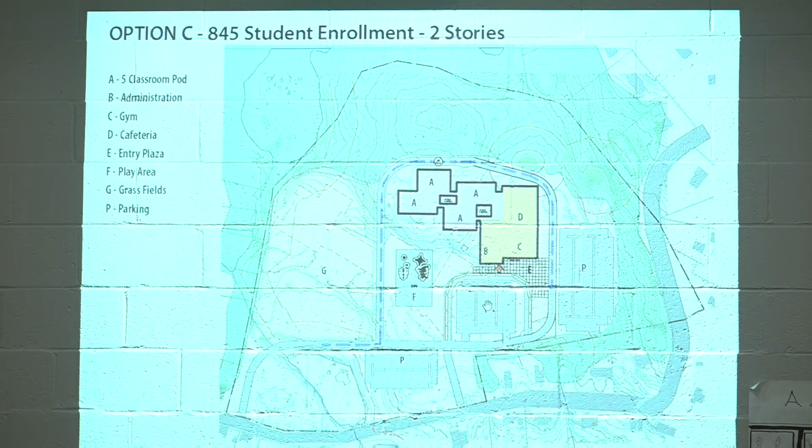And then we go into the floor plans a bit. And now I just want to ask, can everybody see this? Or we have a corresponding board that might show some more detail. So I can pull that ahead.

Hello? Yep. That's loud.

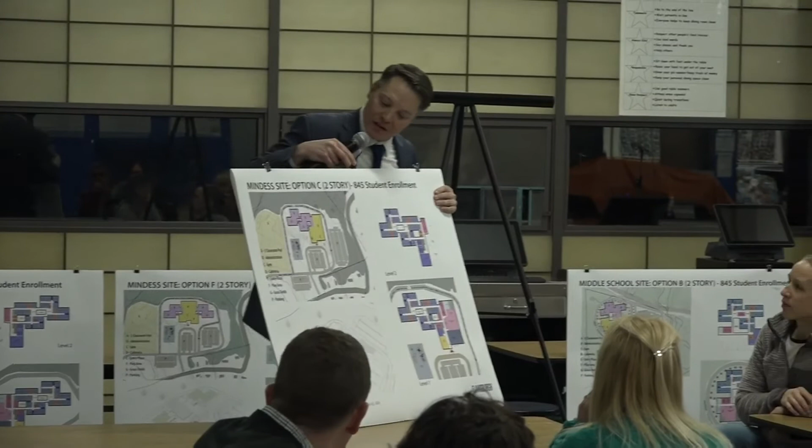So as you can see, this is the site plan with the wings. So you have, for this one, for instance, this would be second grade, third grade, fourth grade, fifth grade on the upper level. And here's the community function.

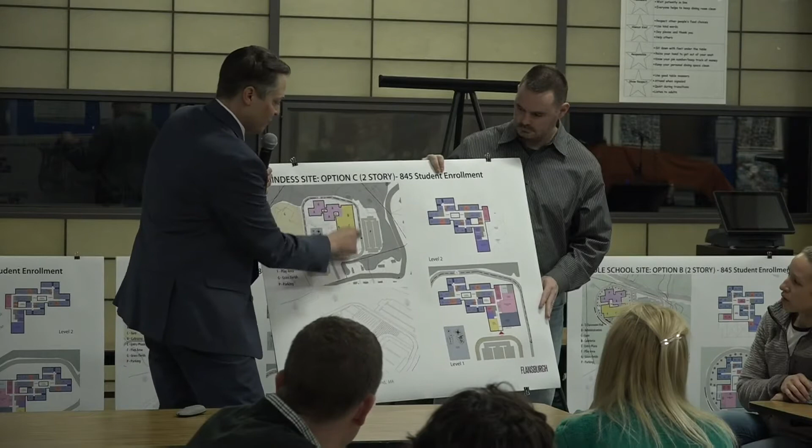Here's that long access for the parent pickup and drop off. And they meet at a new entry plaza in front of the school. And then this would be your corresponding play area.

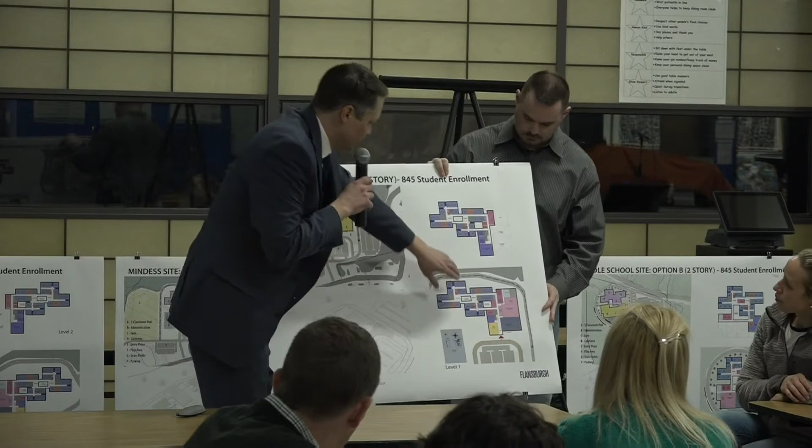And then looking into the plan, what's interesting here is you would enter the school and you'd have all these common spaces used, and you'd be able to lock off the academic wing for after-hours use. And the pod configuration provides an opportunity for collaboration. So within each of these pods, we're able to create a common academic space or team space. And so we feel this is a successful plan.

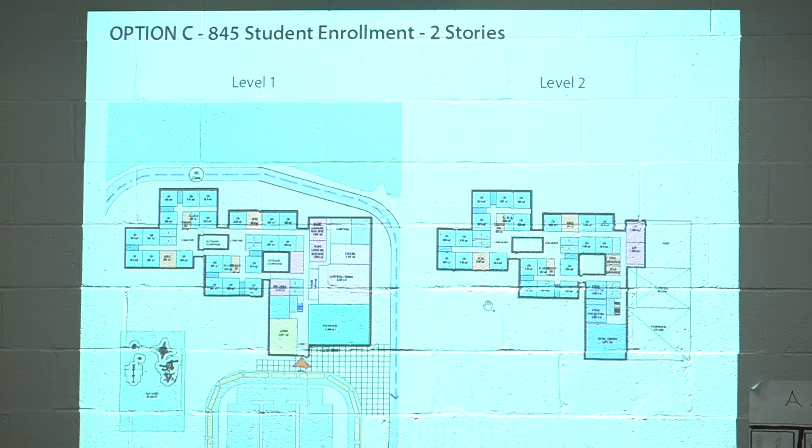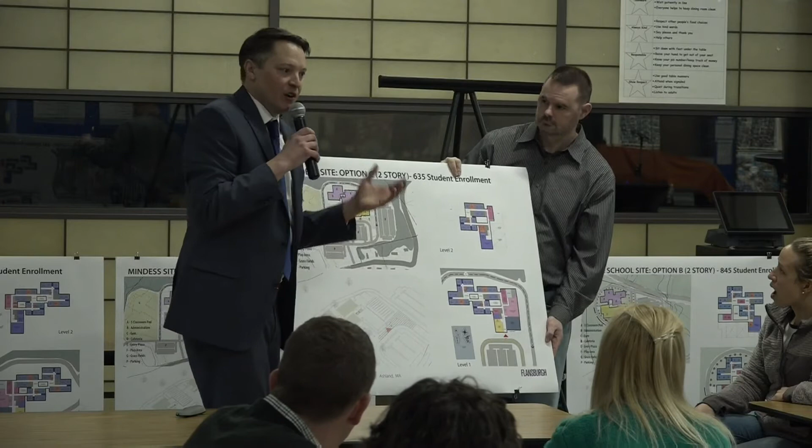And then if we look at its corresponding 635 option, it's simply removing one of the academic wings. So when you look at the big difference between the two options, you're eliminating that one grade. We're keeping everything else the same. And then you have a third, fourth, and fifth. So pretty straightforward.

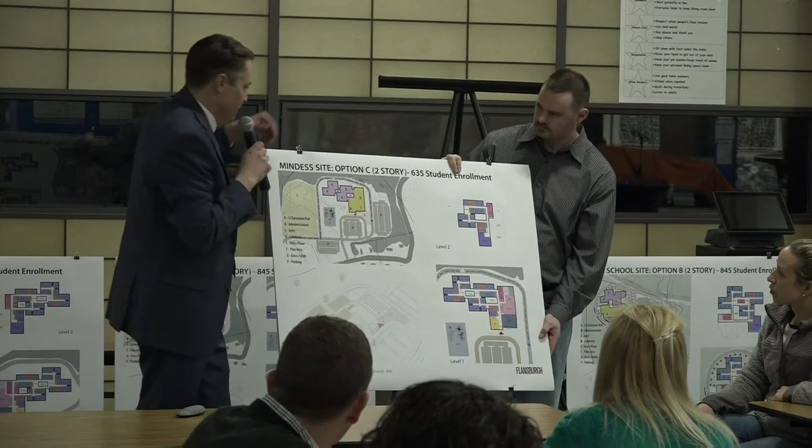Do you want me to pull that one out? Yeah.

So another way to look at this option is we looked at it flipped. And this is right along the edge of the knoll, the hill, the wooded area. And we have some physical models over there if anybody wants to take a look after. This one locates the community function kind of nestled in the woods, while the academic wings are in the field, if you will. Same kind of entry plaza, play area, and a large space for the open fields.

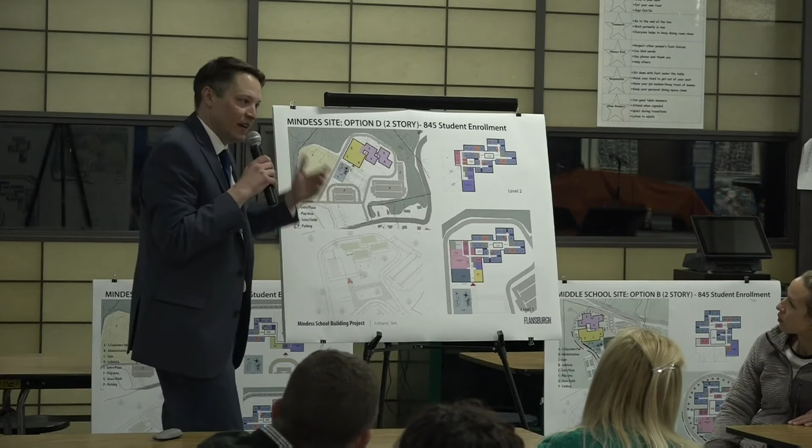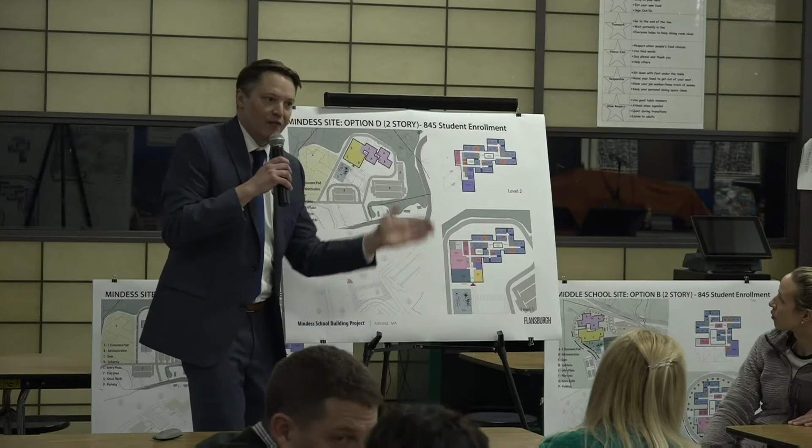But again, getting into the plan, you're seeing these opportunities for either outdoor classrooms, all clustered around these team commons. So the academic experience isn't just classrooms off of a hallway, but classrooms that are all configured around open collaborative space. And we think that's very important, and that's what resonates with the educational plan.

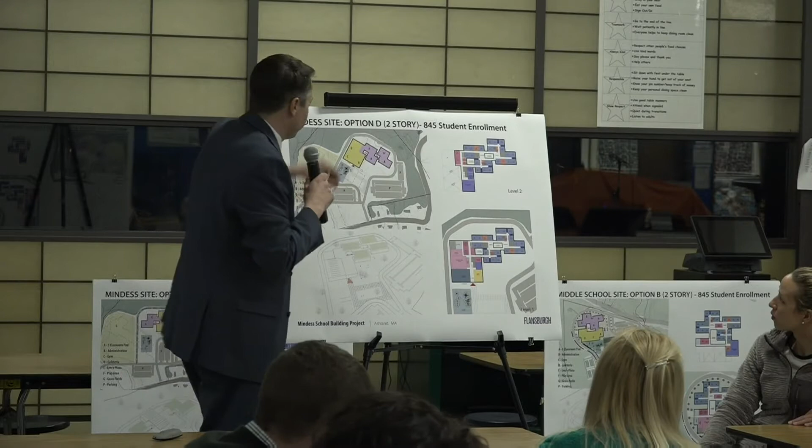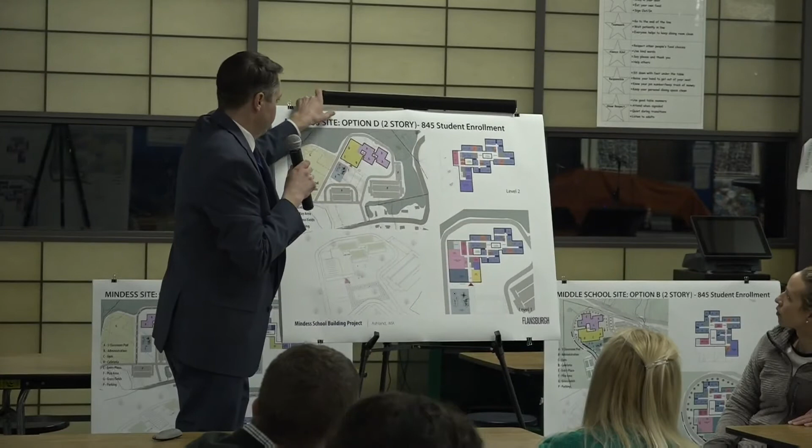So in this option, it's the largest one being studied, so you can imagine 2, 3, 4, 5. And then this one is simply the same thing, just eliminating that one grade. So this would be 3, 4, and 5.

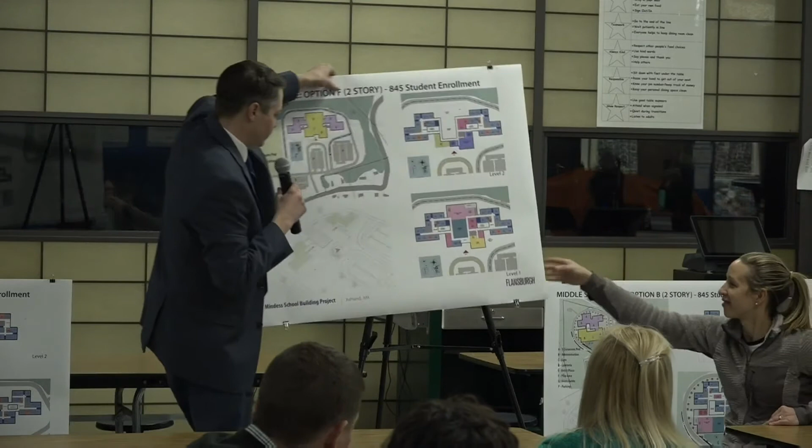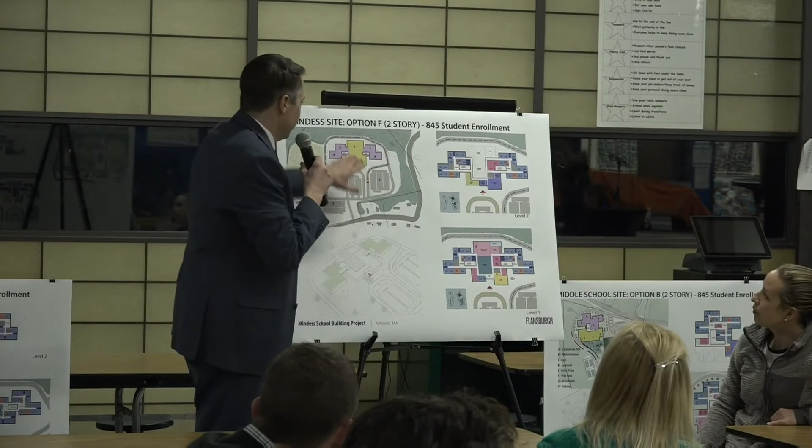So this is option F, which looked at it completely differently, in that the community core spaces were flanked by 2 academic wings. On the larger option, it makes a lot of sense. You could have a lower school of grades 2 and 3, and an upper school of grades 4 and 5.

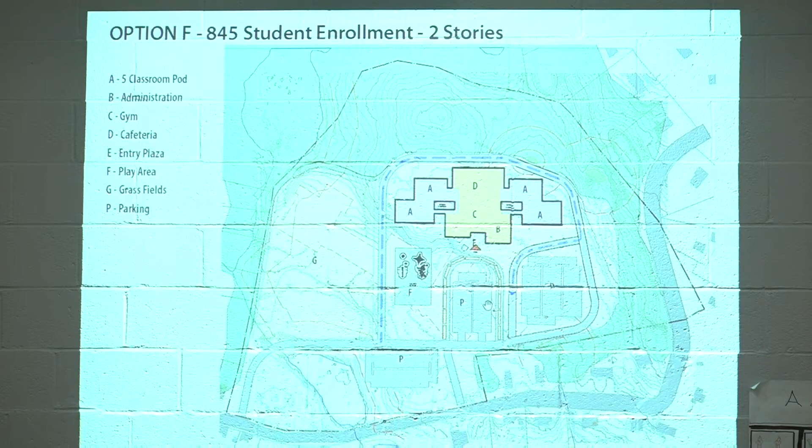But we wanted to look at something completely different. In all the other options you'll see, the academics are kind of on one side and communities on another. This is a different approach, a very traditional symmetrical approach. So we have our parking, drop-off, play field, and again academic wings flanking the community functions. This would be a lower school of 2 and 3, and 4 and 5.

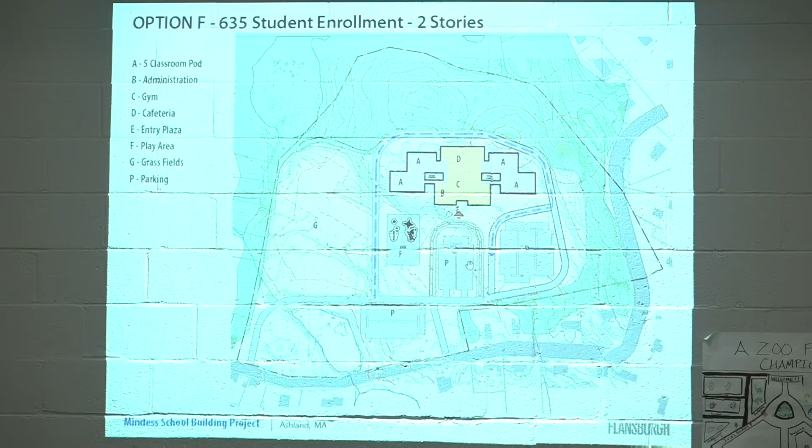Similar configuration for the smaller enrollment being studied, and this eliminates one of the grades. So this could be grades 3, 4, 5, or however the pieces want to get juggled around.

So those are the options at the Mindess site. All of them are behind the school, and 2 of the options have the academic on one side and community on the other, while just one option is completely different, with the core in the center and the 2 academic wings flanking it for an upper and lower school. Are there any questions you may have before we go to the middle school site?

No? We'll move on. At the end we can go into more detail, and then we have the physical models that we can take a look at as well.

So what's valuable about this process is testing out this kit of parts, if you will, again for a 130,000 square foot building. We're trying to look at it as 2 stories. We have the play area, we have the parking demand. We see for the largest enrollment probably 250 parking spaces, and for the 635 enrollment, around 200. So you have a lot of program.

When we began to look at the middle school site, you could see how it was stressed a bit. We started the process by looking at the 845, and it does fit. It's a little tighter than you'll see at the Mindess school site, but part of the process we want to go through is understanding the pros and cons of the same program on 2 different sites.

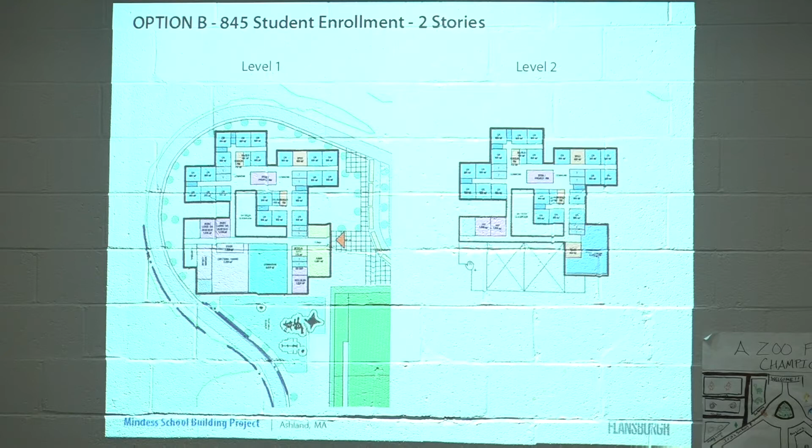One of the advantages to going to 3 stories is you provide some opportunity to access some of the 2nd level roofs, and we see a lot of green roofs being populated, so it's roof area that becomes educational space. We think that's important to take advantage of.

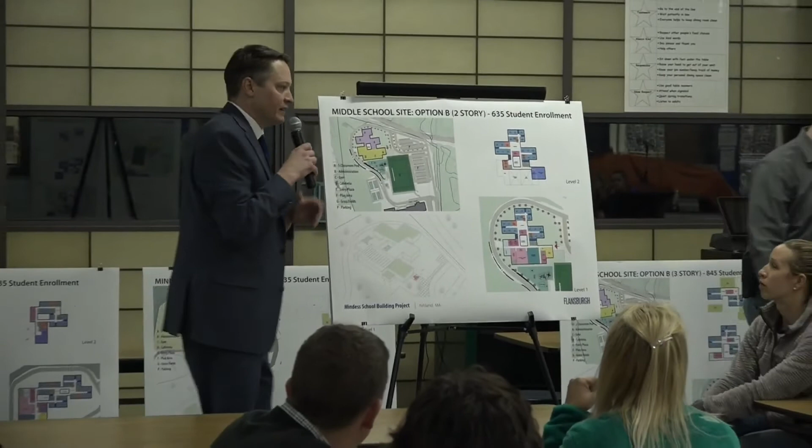Yeah, so it's outside space, so there's play area that you'd see on the ground plane, but if you can take advantage of the roof area, there's opportunity there. And so sometimes we see planters or

But it works, and there's some nice academic spaces that can be captured. So you see a large team commons between the 3 pods and some enrichment spaces within there, and then courtyard spaces as well to bring light into those areas.

And so another way to look at this option is compressing it as much as you can and freeing up the site. So in here, this is a 635 option for grades 3, 4, and 5 on 3 stories. So same core, and here you have the academic wings, so you can imagine 3, 4, and 5. And again, not uncommon to have a 3-story elementary wing, but this creates the smallest footprint for the 635 enrollment option.

And we're testing all this, and it's brought back to the school building committee, and they're going to have criteria, and they're going to be evaluating all these options.

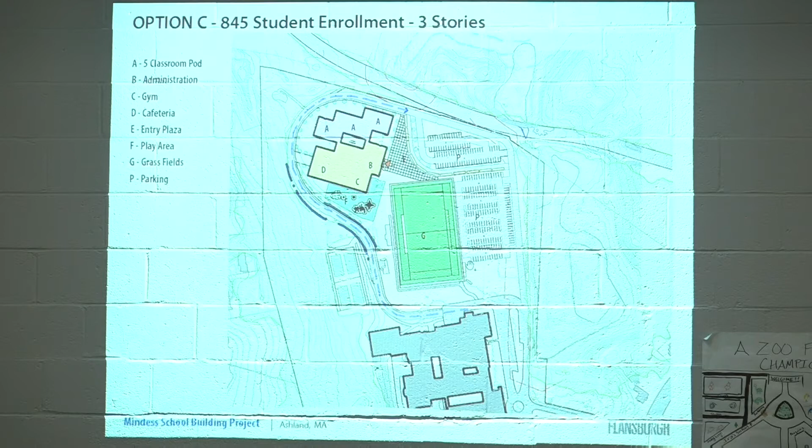This creates some relief within the landscape, and so again, first, second, third. And then for this 635 enrollment option, it's 2 stories and very straightforward. This would have some nice opportunities, again, to separate the community use from the academic, and also some interesting team spaces within each of those 5 classroom pods.

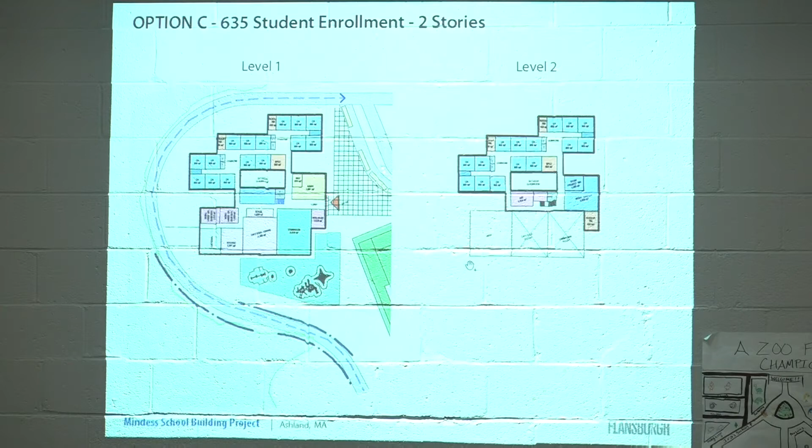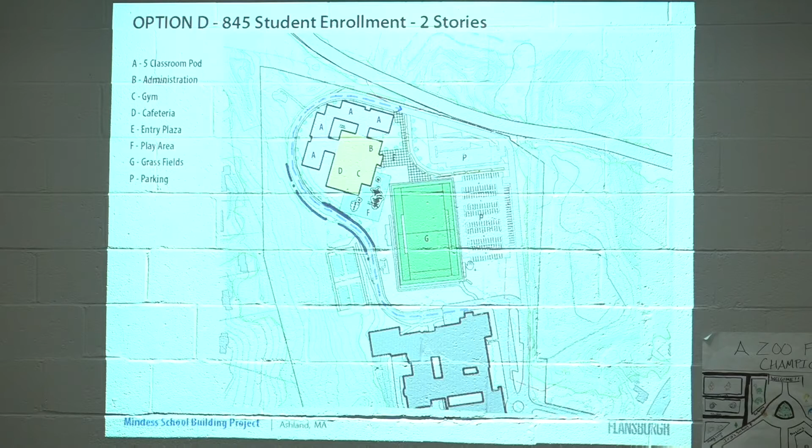So then the last option went back to looking at the largest enrollment at 845, and probably the most efficient layout we could pull together. So we have a large area. The plan is slightly skewed, frees up some breathing room around the multi-purpose field, and very straightforward L-shaped academic bars with the core. And so on the largest enrollment, you could have 2, 3, 4, and 5. So a very straightforward plan.

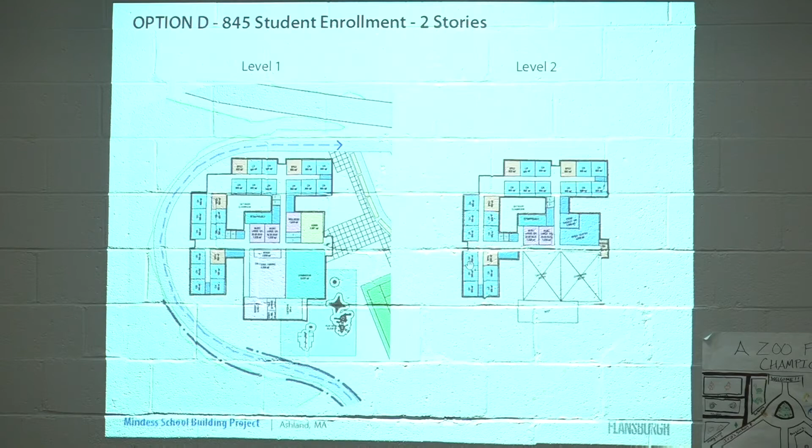And then converting that to the 635, simply eliminates one of the wings here, and we have some art spaces located on the upper level. So that walks everybody through where we are with the design options, and this is what the school building committee, they have a meeting tomorrow to begin the evaluation of these options.

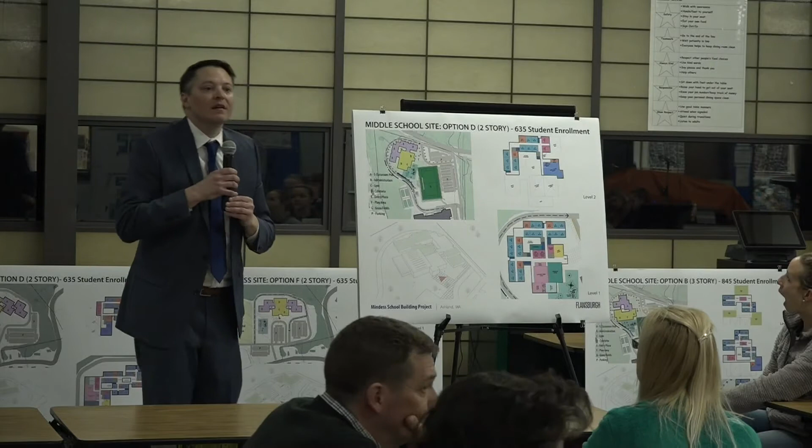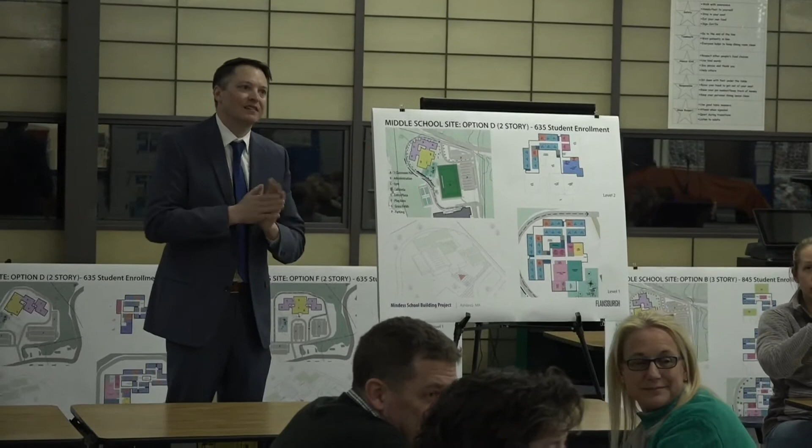We all want to be able to hear you, Jimmy. Oh, my. The site plans are all your current ideas of change from the original.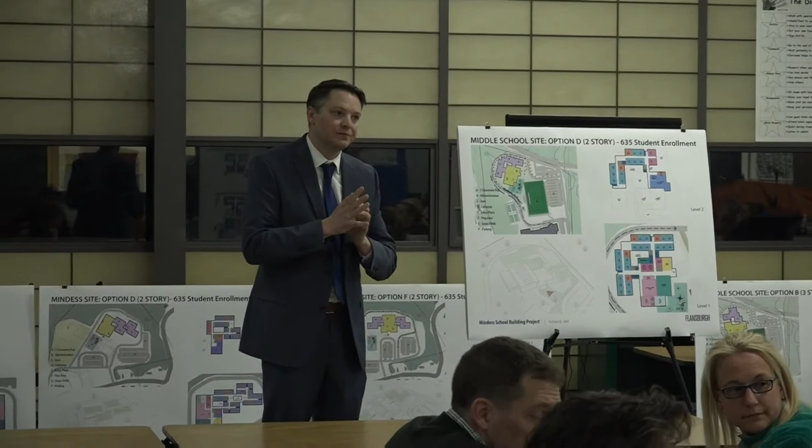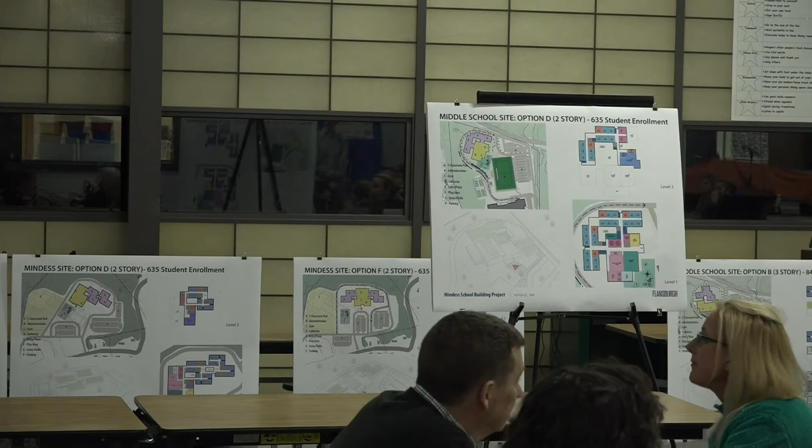We have a bylaw that says all rainwater, rain runoff water, or any other water has to be maintained on the site. Now, does that take that into consideration here? Yes, all stormwater and runoff from the parking, the buildings, and at the middle school site, we need to consider even the existing middle school to an extent with all the impervious pavement. And we have a civil engineer who will create narratives to capture all that with a stormwater system. So yes, that's part of the pricing. So you're seeing the design, but we also are creating estimates, and so the stormwater management system is part of that estimate, yes.

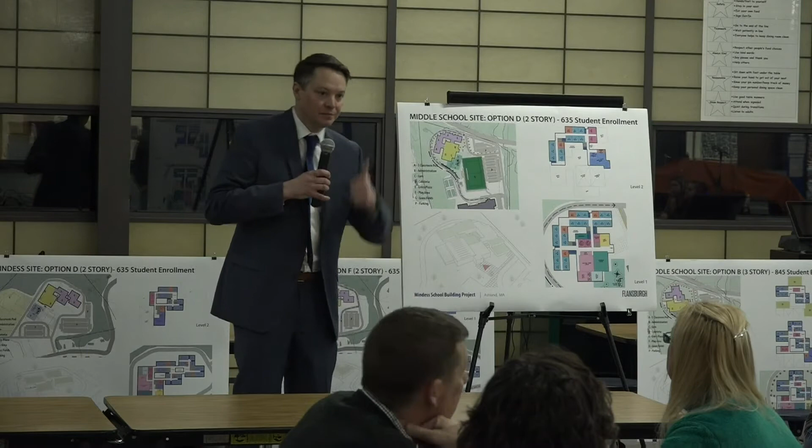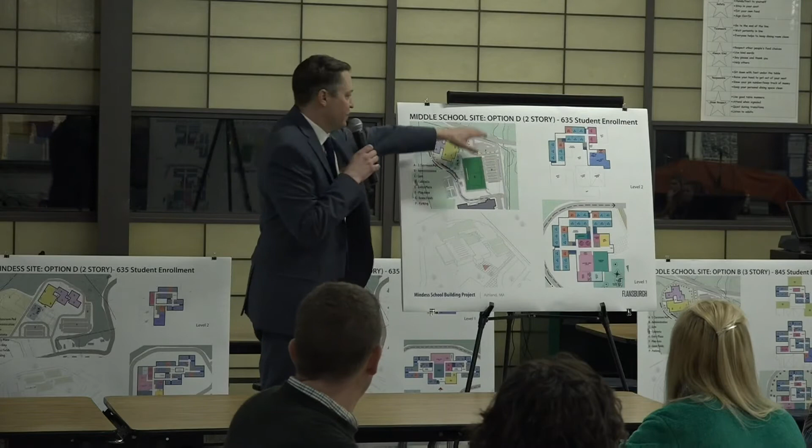If Mindess is moved to where the middle school is, will traffic be going in through the MBTA access road, or will it be going in through the middle school driveway? Is there access, if it's at the middle school site, is there access from the MBTA access road or off of West Union?

So currently, we do not own that land, but we're in discussions with it, I think we would like access there regardless of this project, right? Even from the current situation at the middle school, having another form of egress, access and things like that. So that impacts not even just the operation of the school, but utilities that could come from there as opposed to all the way runs from 135 or from where the middle school is, depending on that. Also construction access. And so for a project at the middle school, acquiring that, it makes a lot of sense, it would make it a much more viable project for sure.

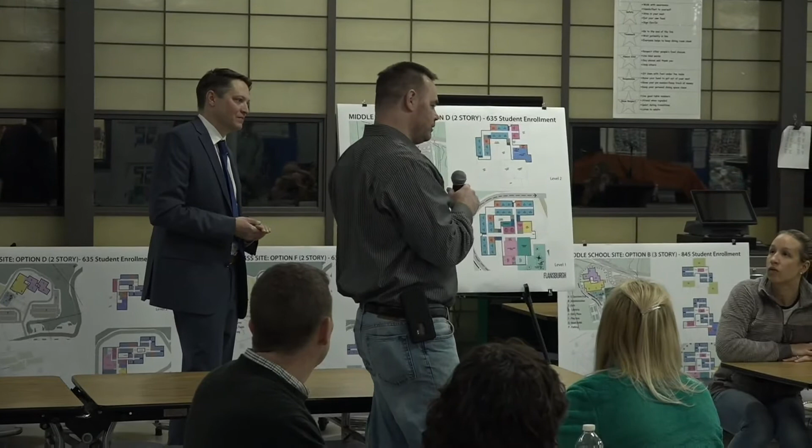So in an ideal world, yes, that's what you hope for, but it might not happen. We can't show it on the plans right now because we don't own it or have easements for access right now. Whereas if you notice on the Mindess site, he did mention Fisk Road, because our property line goes actually over Fisk Road.

So you'll see over there, we could actually use construction access off Fisk if we needed to or wanted to for the Mindess option, because we currently own property across Fisk Road.

Yep, go ahead. I have like three questions.

If Mindess gets moved to the middle school, the two schools will not share buses, correct? Correct, there's nothing about combining them other than having a campus feel. So busing is something we'll work out. Jim and everyone has looked into it. At most we'd be adding a bus, but those are details we're already looking into, as to what the impact would be servicing four grades and what that looks like.

One is, you talked about the need to queue 80 cars. Where does that come from? It's been a while since I picked up a kid at a school, but I'm wondering, is that being given as a necessity, and where does that come from?

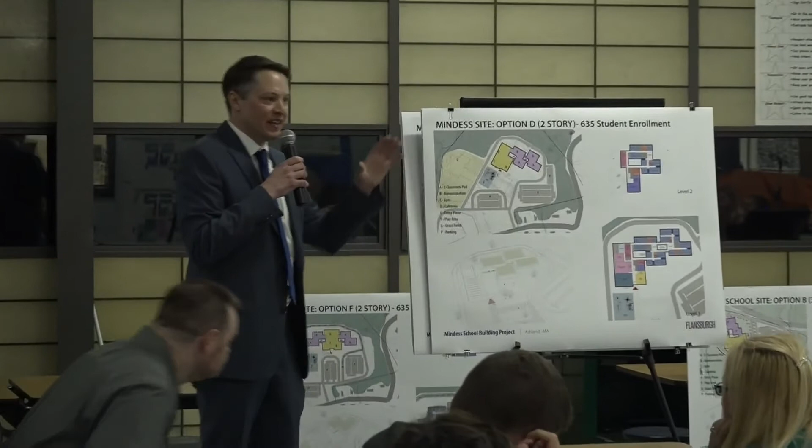So part of the feasibility study, which we're required to do, includes a traffic study on site. They observed pickup and drop-off at the middle school site and the Mindess site, looking at it in 15-minute intervals. Dropping off at this school at one point for 635 students, or 600 in current enrollment up to 670, was approximately 60 cars at one time in a 15-minute interval. They add more queuing space for the largest enrollment, and that's how we got to 80 cars.

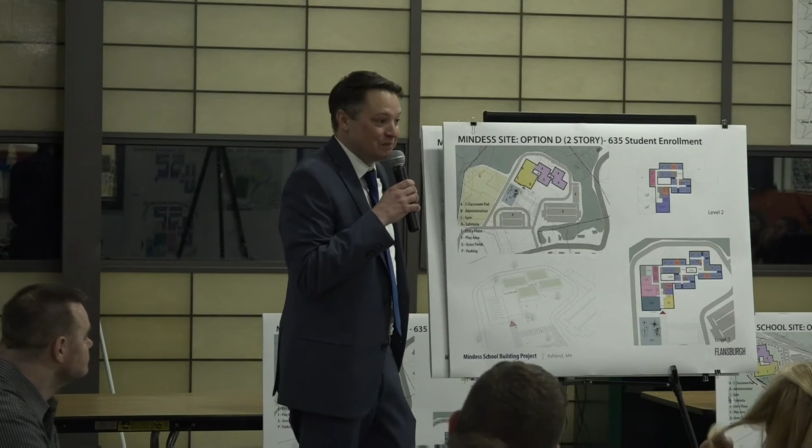Pickup is sometimes the most stressful because people arrive early and begin queuing, and 80 cars goes quick. That's why you need that length for vehicle storage on site, so it doesn't back up onto Concord or West Union. But it's part of a traffic study by our traffic consultant.

I guess the only other thing I'll say is, if it creates an expensive and sprawling project, we should look at ways of managing that rather than just accepting it as a reality. But the other thing I wanted to ask about was all these different options—what you're not showing is the number of mature trees that would be cut for each option, and I know we have a whole section on sustainability here. I'd suggest that as we go through this process, you lay out pros and cons, and especially when thinking about children and climate change—this is really their inheritance—that we have a project that's as sustainable as possible, noting if we're clearing mature trees in any option. I think that would be an important factor to have.

So thank you. To address both those things, Rob: first, the queuing—as you'll see on all of them, it's usually going to use that loop road around, so it doesn't increase the size. That loop road is needed for access for emergency vehicles anyway. In some projects it might not be paved all the time, but it's there; we're just paving it and using it for queuing, so that wouldn't impact the project from that perspective.

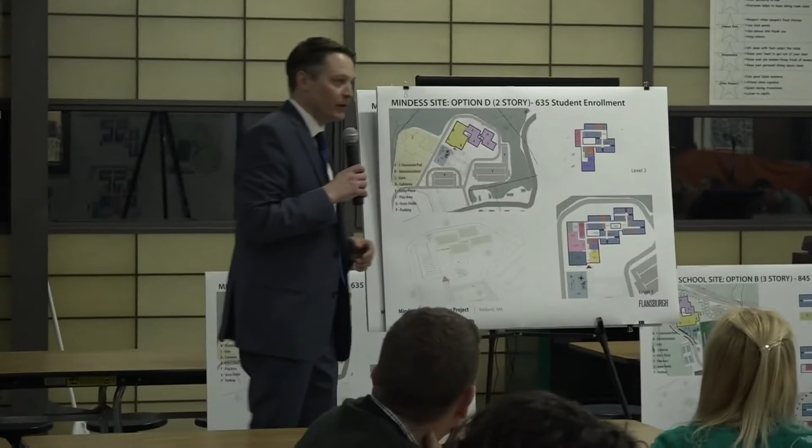My question has to do with the play space, the outdoor green space for the kids. Thinking about the site at the middle school, it seems like there's less play space for the kids. I know they can utilize the turf, but the middle schoolers utilize the turf as well, so it would be more of a shared space. Whereas now on the Mindess site, the kids have quite a bit of space, so I wanted to ask how that's going to get reconciled.

I think for starters, that's why we want to make sure we get that 20,000 square foot range just for play space. I think supplementing with the multi-purpose field is a good thing. That would have to be scheduled with their recess time. But you will not, as you see in a lot of the Mindess options, the grass play area given back in all those options. There's just not the opportunity because it's monopolized by the parking spaces at the middle school.

And for the most part, the turf field isn't used during the same time as recess would be. And even if they did, most of the time for the middle schoolers they get like 10 minutes at the end of their lunch period to go out there, and they never venture out that far anyway.

So the idea is you're still going to have, and we're trying to compress - as you saw we always started with a 3-story 845 option with everything. That's your biggest footprint to make sure it fits. If you just stick an 845 on there and you don't do a lot of manipulation, it's tight, and you're really squeezing in that play space, especially with the loop road going around the building. But as we work with the design, we will free up outdoor space and probably have a bit more. It won't just be, hey, you're either on a play structure or on the turf. There'll probably be some middle ground there as well.

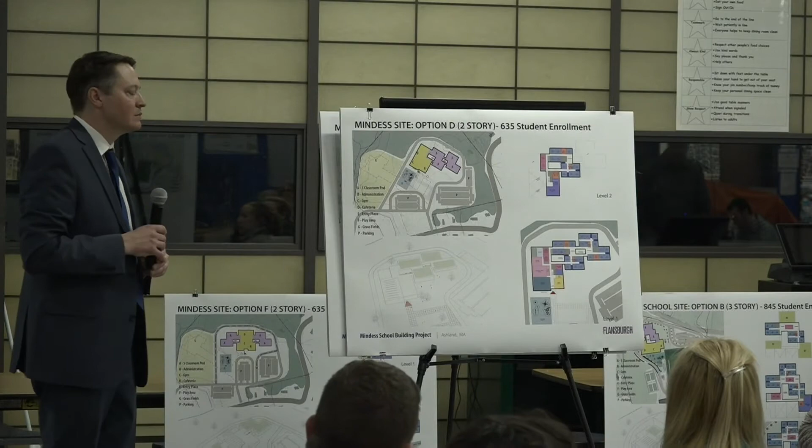If the new Mindess was to be built here at the old Mindess, would that affect outdoor recess during the construction?

It would certainly impact the use of the play space. We would still be able to have a really efficient outdoor recess because we'd be able to utilize the front space instead. We would lose access to the climbing structure, but I think we'd be able to have a great recess because the majority of our students really play in the green space on the field, and we would open up the entire front of our school for kids to have recess during that time.

These are all great questions. Keep them coming, because this is going to help the school building committee with their evaluation.

I wasn't at the last meeting, so this might have been covered, but I was wondering for a refresh on the timeline as far as when this building project would start and when it would be finished.

All right, so timeline. The more immediate timeline in front of us is to get the feasibility study completed and then brought back to the town voters. The major milestones are that the School Building Committee, Board of Selectmen, and the school committee would make a recommendation on the option that would move forward in April. So this April they would pick the big ticket items, the size of the school and which site to move forward on. Then it would go into the schematic design phase of the project and come back before the town for a funding vote in the special town meeting anticipated in November with a ballot in December.

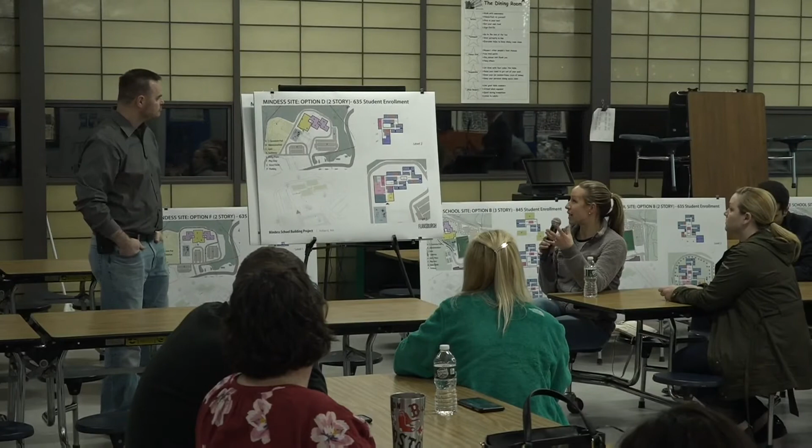Might be a silly question, I'm just kind of learning all of this now. So if you guys are looking to buy the land to have an access road from the commuter road area, are you also trying to buy some of that land to then make this footprint not be as condensed, so that it makes it a little bit easier for space?

Yeah, so the impact of that lot, I think we have it on here, right? So there's a couple of impacts. It's hard to see the sliver here, but essentially it's this land here. And so it can ease a little bit of the site constraints, because now instead of having this be a setback line here, if we own the property back here, this could sit back a little closer to the road and ease some of that stress.

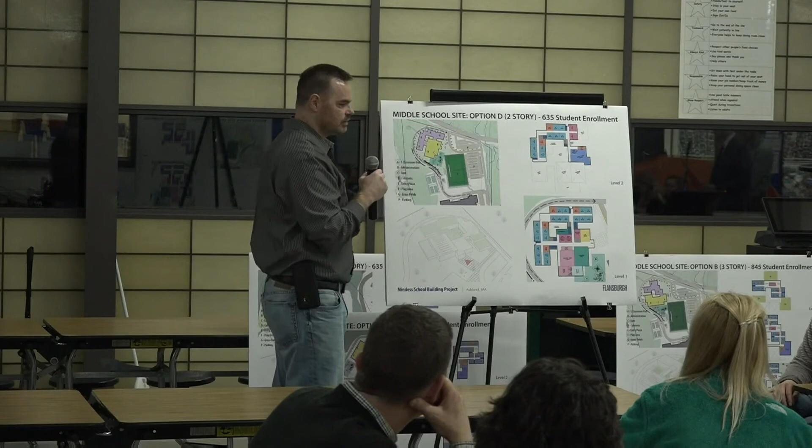And we could potentially have some queuing down there. It helps in the ways I mentioned before, because right now we'd have to, if it's possible to tap into the utilities already at the middle school, run them all the way over here. If that's not possible, we'd actually have to tap in all the way to 135 and go over, which is expensive. Also construction access and things like that—even getting an easement for construction access is a big deal from here. So yeah, that property impact has potentially impact for several different little things.

I guess I'm kind of sitting on the notion of, I forgot about the YMCA. So I'm curious if we've looked at that traffic feasibility with the Y, with the new elementary school, with the middle school, with the commuter station out there—how congested do we foresee that to be, or do we see it as more of a positive, I guess?

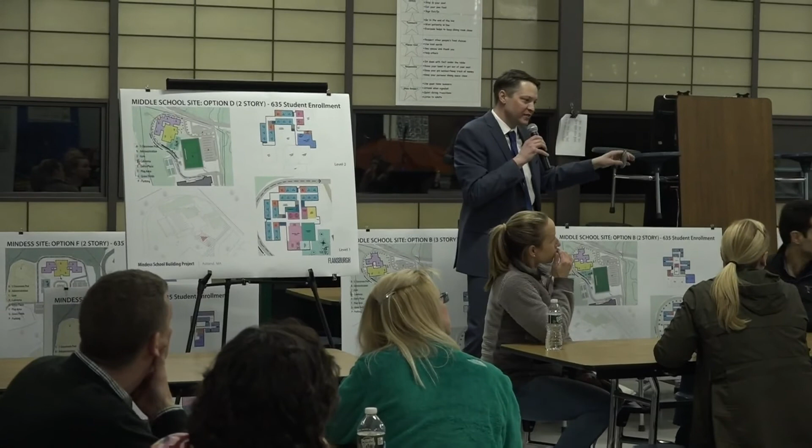Yeah, that was part of the preliminary traffic study. If we were taking a deeper dive into the middle school, they would do another assessment, but they calculated based on knowing the YMCA was there, and obviously the MBTA access and activity. And because we don't have that little sliver, they said, as part of the traffic report, if that was acquired, that would benefit access. But they knew of those other entities. Yep.

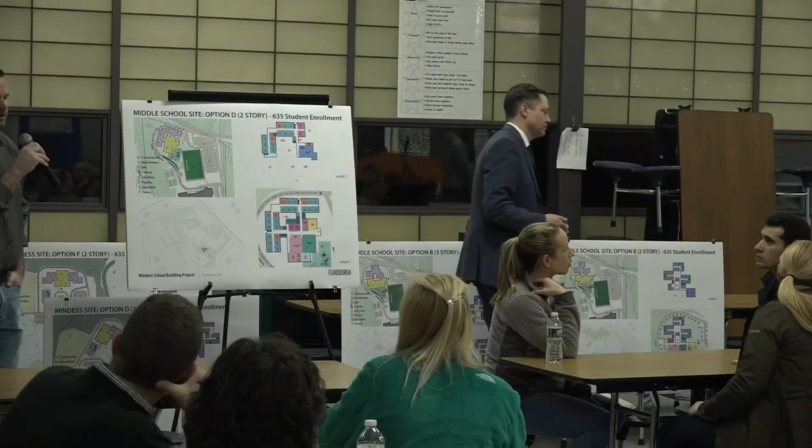I think it's viable either way, but I do think it's something that we would eventually want to have that access. I think we want that access today. I think it just makes sense.

I've already spoken with Michael Herbert about it, so nothing's a surprise here. This has all been discussed, and they're well aware of it.

But to build on what Paul said, the middle school site does survive as it exists today, because the existing West Union Street is a double barrel, two lanes coming out of the site, and has enough queue length on the parcel itself to handle the additional school. Getting the MBTA access would make it better, because you'd provide two means of egress and access to the site. But because the existing school is deep on the site and the new school would be deep on the site too, there's enough room to get people on and off the site reasonably.

Just to add with the pricing component of this, there would be a slight premium for utilities coming from West Union Street deep into the site. But one of the benefits is the middle school and the elementary school still will have staggered start times, so you're not duplicating that population at one time.

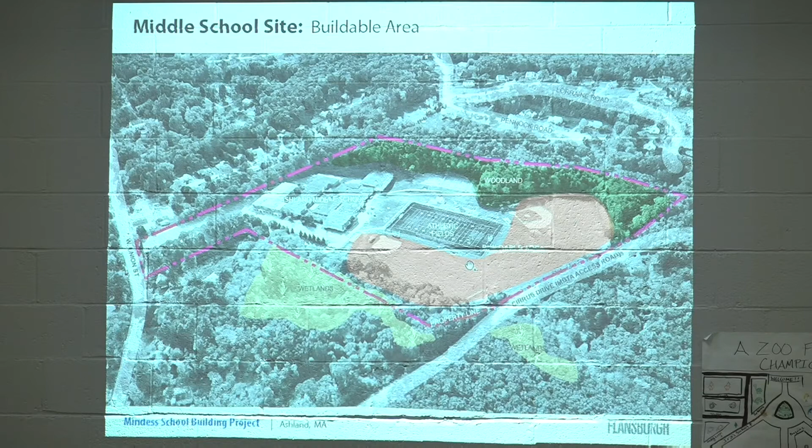You can get there from the backside, run it right down the Woods area, come up to where the site is for the railroad passengers going up the hill to the railroad trains. There's a whole line going right through, and it drops you right in the backyard of the middle school. I don't know how many people have looked at that as an example, but that would take a whole load of school traffic, just for school use, between the seniors and kids with cars and the school buses. It's something that could be asked for if somebody owns it that we don't know about.

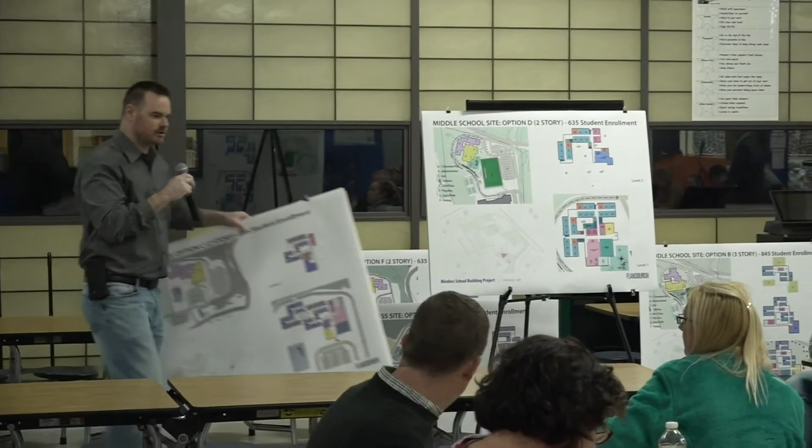That's a good segue into some of the things I wanted to share about what the committee has been considering and how we got to these being up here. As he said, we started with option C, but there was obviously option A and B and things like that before it. So what you'll see on the floor plans is these adjacencies.

For elementary schools, the MSBA does not support auditoriums. So we have an auditorium in this school, it's a great luxury, it's an asset, but in a new building we would not be reimbursed for building that. I couldn't recommend trying to do it on our own, it would be very, very expensive.

So what they do support is what's called a cafetorium, putting a 1,000 square foot stage attached to the cafeteria. Most of these you'll see for lots of different reasons, but also for the utilization of that space. We will see these adjoined to the gym and the cafeteria, so that way we can potentially gain more usable space for those things. We play with the adjacencies and we're going to continue to play with them to see how we would want to maximize that. But that's how it's going to be addressed going forward, a stage attached to the common spaces there.

Some of the things I wanted to point out, and I think the one on the back is a good example of what resonated with the school building committee, is when these pods - there's a lot of them, they don't show them awesome here, but there's these common spaces between them. There were some options thrown out that aren't up here that kind of just had a corridor of classrooms, a corridor of classrooms, a corridor of classrooms. But aside from having nice new rooms that may have better air quality, that's the same building you would have built 20 years ago.

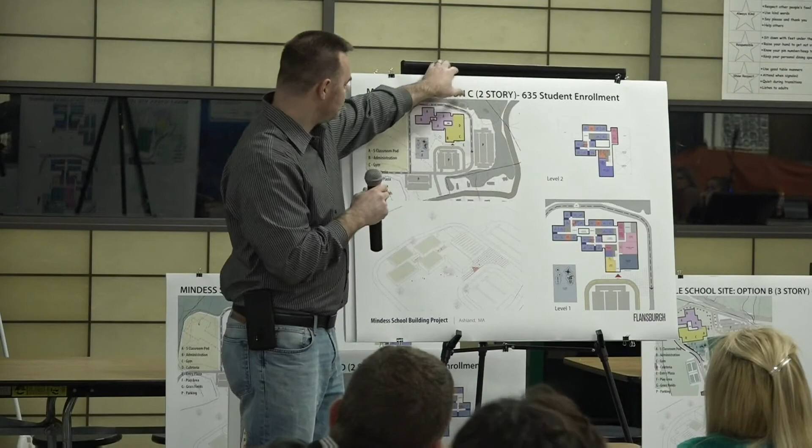What really resonated with us is having these pods that kind of create a little community, and they have these external common spaces where that learning can spill out into these spaces. You can have some really great mentoring opportunities for the different ages, whatever happens - movement, right? The kids need movement, it gets them out of the classroom. So these resonated a lot more. I think this one shows that style of just corridors a little bit more, and not so many of these resonated with the group.

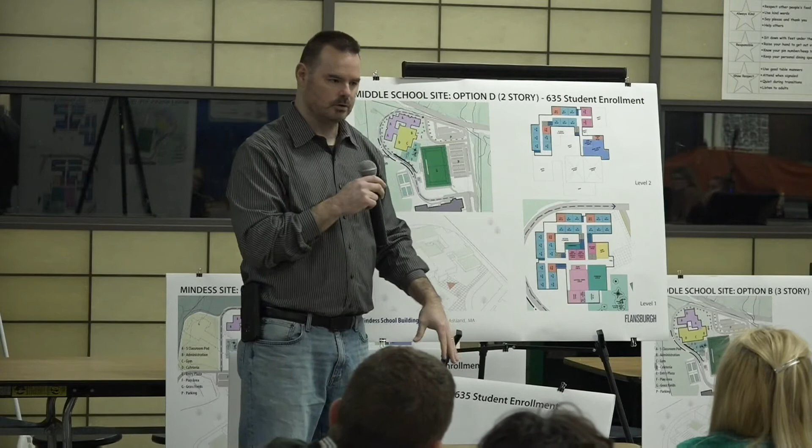Some of the other things Ken had mentioned was how we blocked off - here's the community space, here's the academic space - and I want to get into some of the reasons for that and why that's important. Has anybody ever gone to the middle school for some event that's in the gym and had to traverse half the school to get there, right? That's not awesome from an experience perspective, but it's not awesome from a lot of perspectives.

So here, we want to create a unified entrance, with a smaller number of entrances so we can better understand who's coming and going to the school. We want to have these community spaces here from a sustainability perspective as well. When he said we can close off the academics, it's not just that we don't want people traipsing through, but these are going to be utilized for about 7 hours during the day - after that, maybe we don't need to heat them as much, but these community spaces we do.

When we start talking about sustainability in a bit, you'll come to understand that we're really changing the energy consumption and needs for the building because we're doing that. So those are some of the reasons why you'll see these laid out like that.

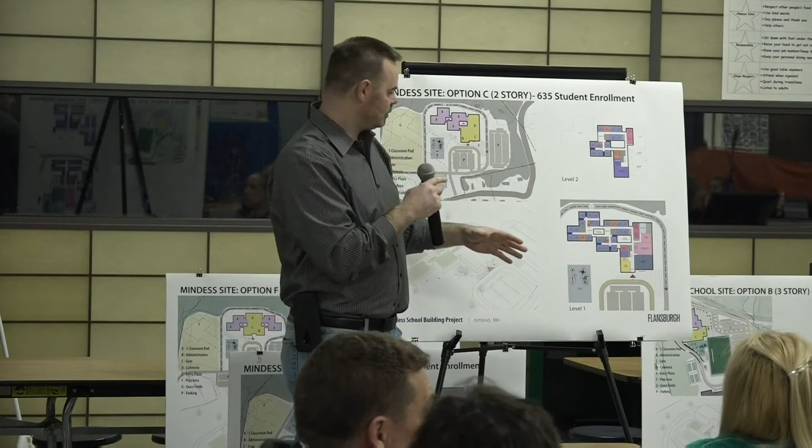A lot of them are also grouped like this because of the flexibility we're going to have here. We might have some bubble grades where it fluctuates either up or down by almost a full class. So if we had these rigid long hallways that were separated, that makes it a little challenging when we have a bubble class. Whereas here, if we needed to, it's like okay, here's this grouping of 5 classes - if this one was a low bubble and this one's a high bubble, maybe that adjacency isn't bad for that bubble year. So those are some of the reasons we like these.

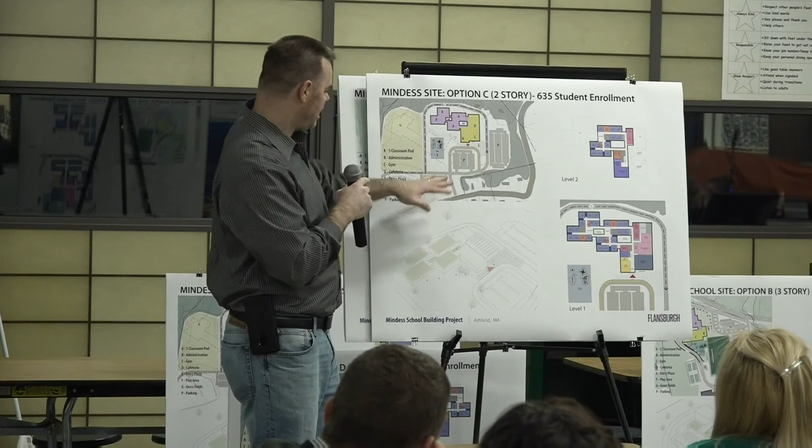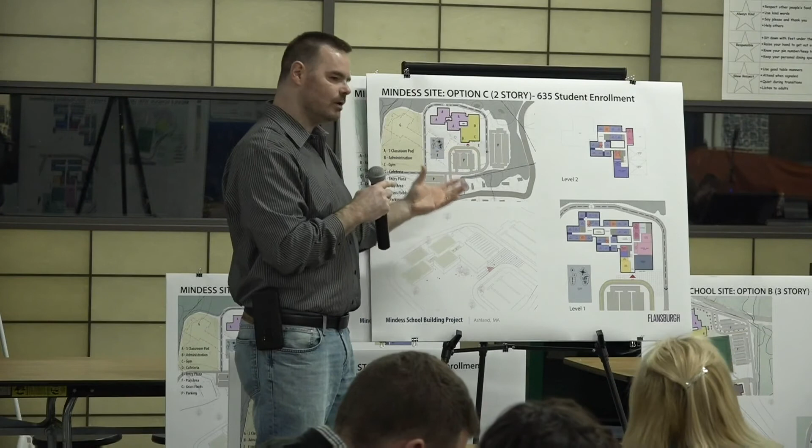How we arrived at this one, which did push into the trees a little bit, was where the parking was in relationship to the building and how it generally flowed with the site. All our presentations are online, so if you go back and look at some of the earlier ones where this was positioned more down here or over, it didn't flow as well and didn't sit as well on the site - we could kind of stick it over here, but then you look at the site and all you see is parking and things like that.

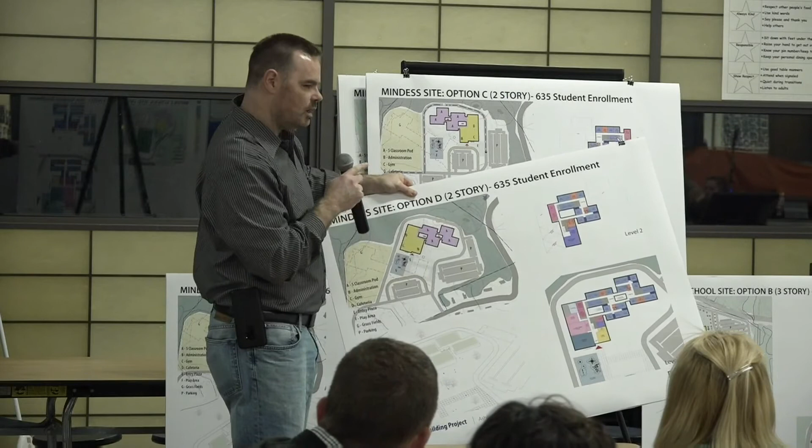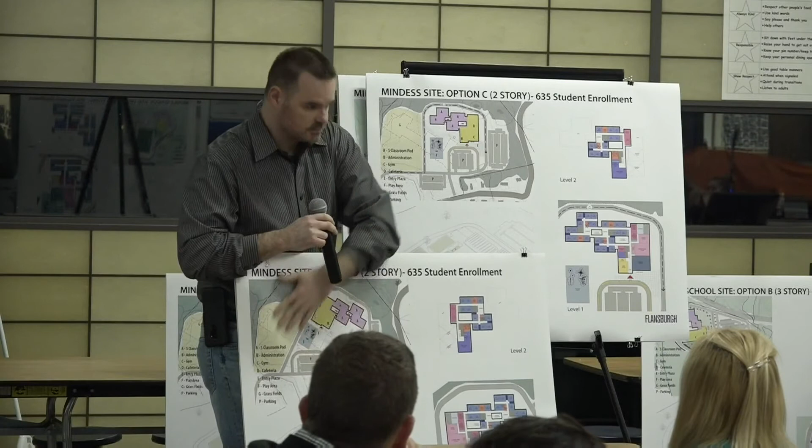You'll see that on this option D, it was the same as option C but flipped. The idea there was twofold: what are the academic wings facing, one side or the other? But also, getting that community space closer to the fields, closer to the play area - essentially on a site like this, during non-school hours, this is your active side of the site, right? There's not really any need for somebody to be over here, which is nice.

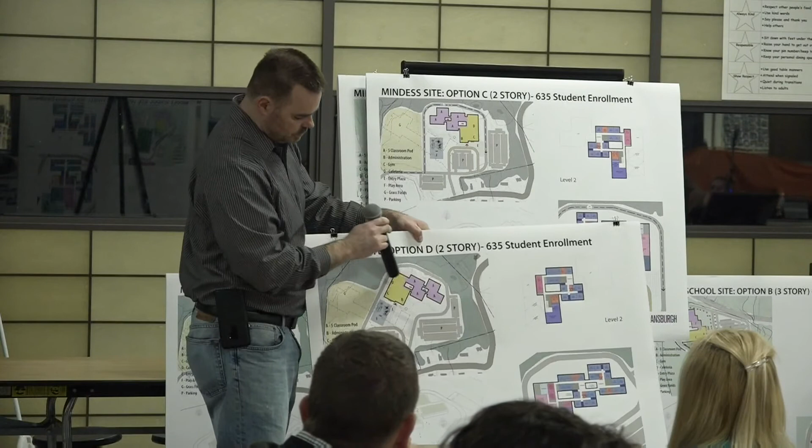If you look back at the models, you'll know that this is a high point in the site. If that's the gymnasium, you don't need windows for the first part of it, so it can be buried into the ground a bit more, and you wouldn't need as big a retaining wall.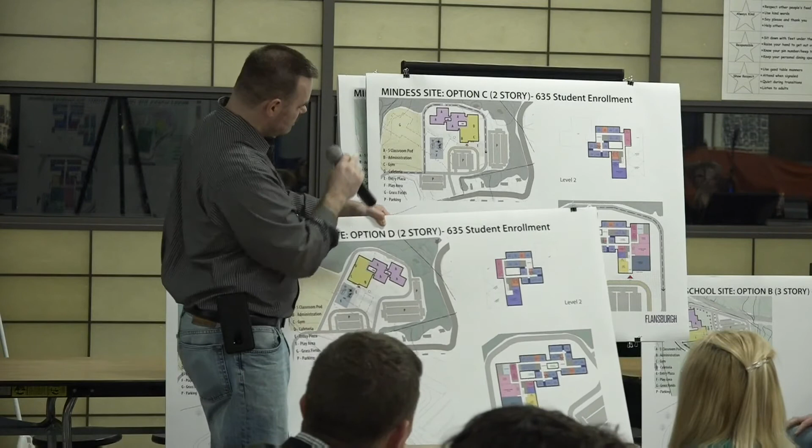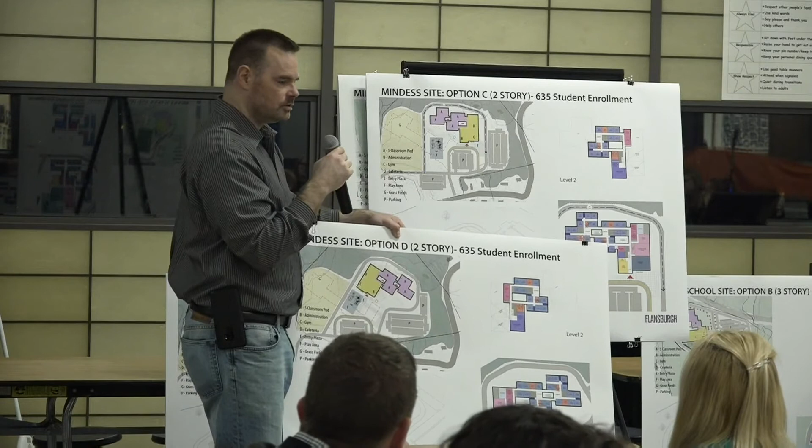So there's lots of different nuances as to why we started. You might ask, why are we flipping these? Those are the reasons. We're playing with it, seeing what the relationship is between those community spaces and the external community spaces that will be used, but also how that impacts construction and price. If we're building larger retaining walls, it does change things.

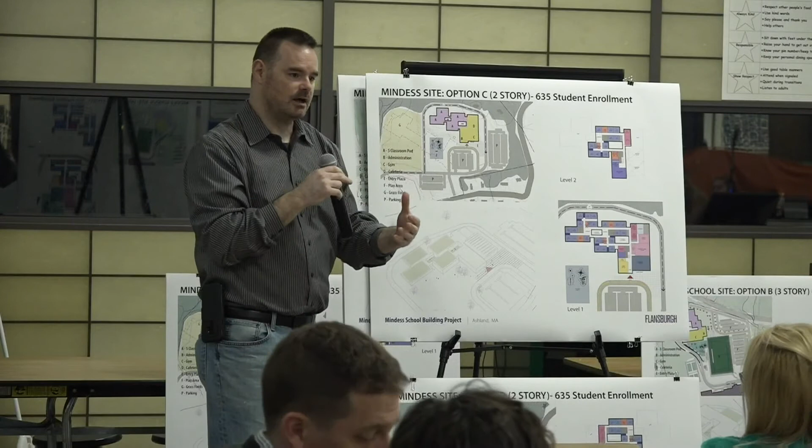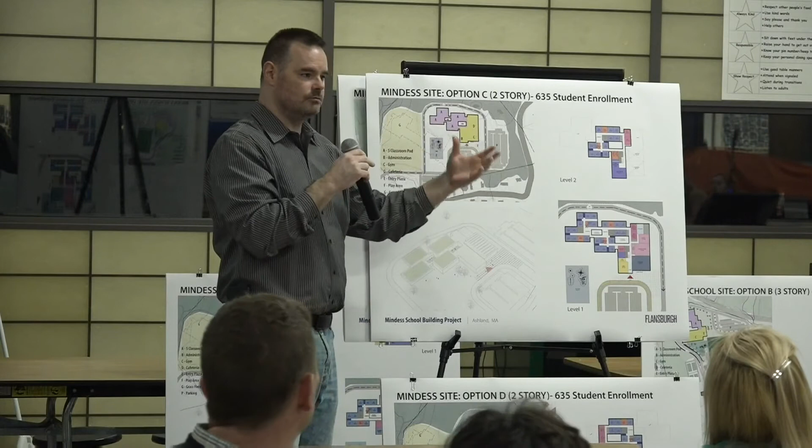But the other advantage might be that in this option, things are staggered a bit. These pods over here might both be two stories but go up on the hill a little. That might allow you to have a green roof over here, so now a class can go out and have an academic space outside in a safe environment on the roof. Maybe it's a learning building too, where some of the building services are exposed so the kids can learn about that.

So those are some of the reasons why what you're seeing here has bubbled to the top. There's been something like twenty-some-odd plus options that we've kicked around throughout the process, so there's been a lot of consideration there. Maybe that fostered some more questions people had.

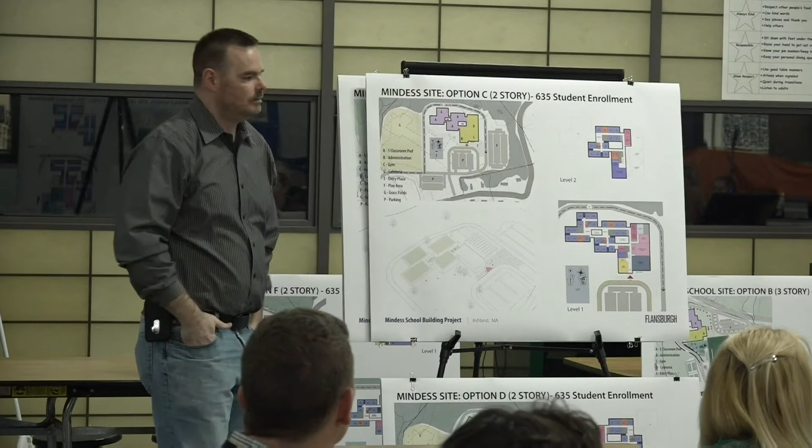You mentioned that the town would be voting on this at a special town meeting in November. What exactly are we going to be voting on at that time? So Jeff, do you want to talk a little about the process, and then I'll talk about the rest.

Sure. So you'd be voting on the total package, which is the scope, schedule, and budget. With the submission in April and the following one in September, the town boards would be submitting to the Mass School Building Authority that they want to build a school of a certain size at a certain location for a certain cost on a certain schedule. Those four things come together in what's known as the scope and budget agreement, where the MSBA signs off and says they will reimburse up to a percentage—around 55%—of all eligible costs. There are various caps within the MSBA program, but essentially, with their October board vote, the MSBA would come back and say they agree with the request for the size, location, and cost of the project, and they're going to pay that percentage.

So it's a single vote from the town at the town meeting and at the ballot for the project in its entirety. It's not an a la carte vote, it's a single vote.

Okay, so it'll be the school committee and the state of Massachusetts coming up with an agreement on the location, the plan, and the number of students, and then the town votes yes or no to that?

Yeah, so the school building committee makes a recommendation, and the school committee itself and the Board of Selectmen review and agree to that recommendation to then go back to the Mass School Building Authority. So the three boards in town will come to a conclusion about the preferred option that they would like to request on behalf of the town.

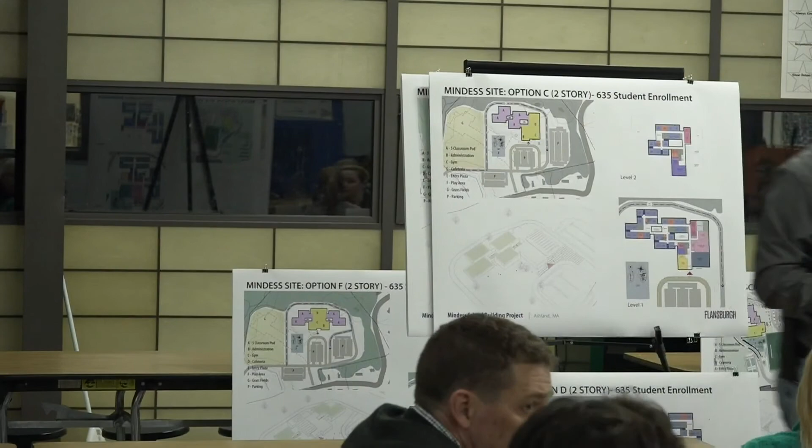My question is, are these options, as we have them now, are they like a puzzle? In other words, if the school committee decides they want option A, and the other committees want C and D, if that's what they choose, do we have any problem with putting them all together without any other trouble?

Well, so that is the whole idea of, we've presented a couple times to the select board, to the school committee. We hope to have 2 tri-board meetings. So at the end of the day, hopefully we've already had those conversations, and all 3 boards, the building committee votes to recommend a preferred solution to the town committees that will actually vote on them. So there's 3 votes, but one of them is a recommendation. The other 2 are the binding, hey, this is what we want to submit, right? So the idea is, we need to work through that, and hopefully we have the time, and we're definitely trying to make sure that we have those meaningful conversations early and often, so that we're all on the same page.

Like I said, I did a presentation to the school committee on the options at the time with the ballpark construction estimates, I believe it was January 8th, and the select board beginning of this month. So hopefully there should be no surprises. I believe I'm on the schedule for FinCom tomorrow to in their forum talk about these options. And so I foresee us being completely unified when it comes to that, but having healthy dialogue between now and then.

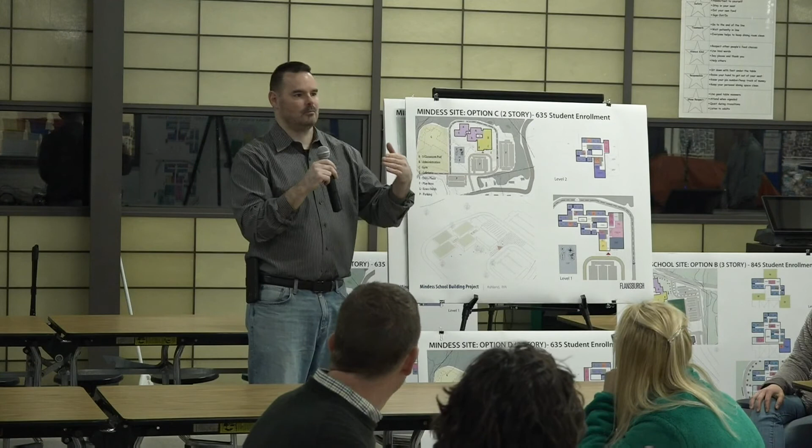So, to regurgitate what you said, the community wants to be engaged, and by all means we make every effort we can think of to do that. If there's another method anybody has that we can engage that we're not doing today, we want to do that. Everybody's input is important. We were at the Educational Visioning Forum and got a great idea from somebody. It doesn't matter who you are, all it takes is one great idea from every forum, and it's worth it.

So, in May we're going to have, we want a building of this size, this configuration at this site, and that's the goal for that, and then we'll get into the schematic design after that. Questions?

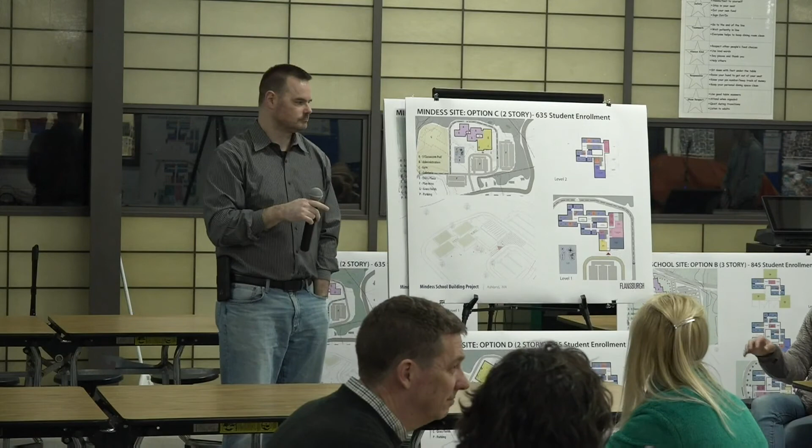More of a comment, but since you were saying feedback is good, just as a parent, I'm more about the structure, because as far as which one, that's probably out of my hands. But having things like the green space and more of the outdoor space I think is really important, as well as bigger windows or skylight kind of windows, having more of that outdoor light, as well as the inner pods. So as far as comment, I think the pods look much better than the long hallways that I had back in grade school. And also thinking about the other green space around—things like trails and other use, not just the slides and the traditional playground.

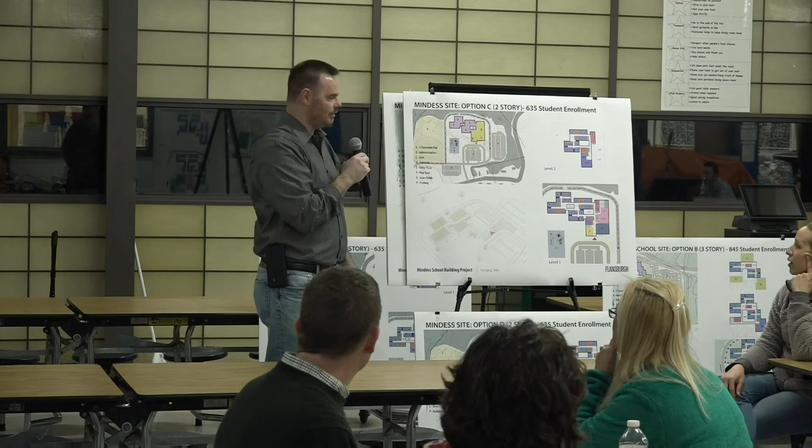Yeah, those are definitely things we're thinking about, and good comments. So the natural light, we want it and we want to control it. You can ask Mr. Cairo about it—we have some natural light in here that we don't like because they have to cover it up, it's glaring. So we want the natural light, but we want to do it with good design that maximizes it. You'll see that all these we're looking to make sure they have the natural light. And then you have the outdoor spaces in the middle that can also provide some light to the common areas and things like that. So definitely things that we're considering.

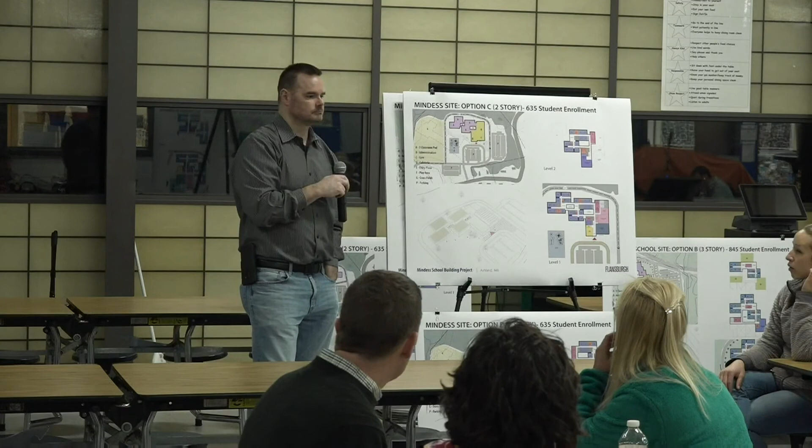You mentioned a parcel of land that we don't own up by the middle school, and I'm just curious how that affects the project going forward. If we do get it, what are the chances of that? What does that look like? And if we don't get it, what does that look like?

Yeah, so essentially, as Jeff said, it's viable as is, because we wouldn't have these options up here if it wasn't viable as is. The impacts are potentially, certainly, flow and convenience, right? So having that access off there after a school is built, from an operational perspective, is much better. From a construction perspective, having construction access there as opposed to having to come—the middle school's back here, right?—as opposed to having to come off of 135 and all the way over, come over here.

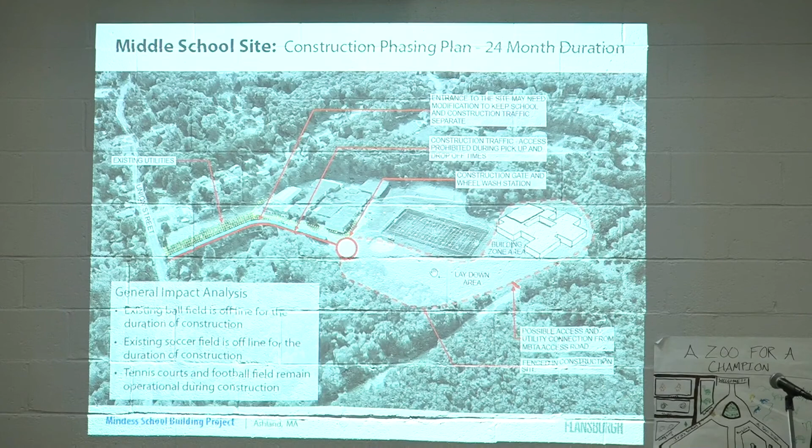And so construction access matters, and also price from a utilities perspective. I believe, and Rob, you'd probably know, the utilities were all redone when the MBTA access road was done, so we got prime access here. If that was an option, certainly the best is to get utilities here as opposed to even tapping in and going all the way across from a cost perspective. And we're not even sure whether we could tap in here or have to go all the way to the road, and that's certainly a long run for those utilities.

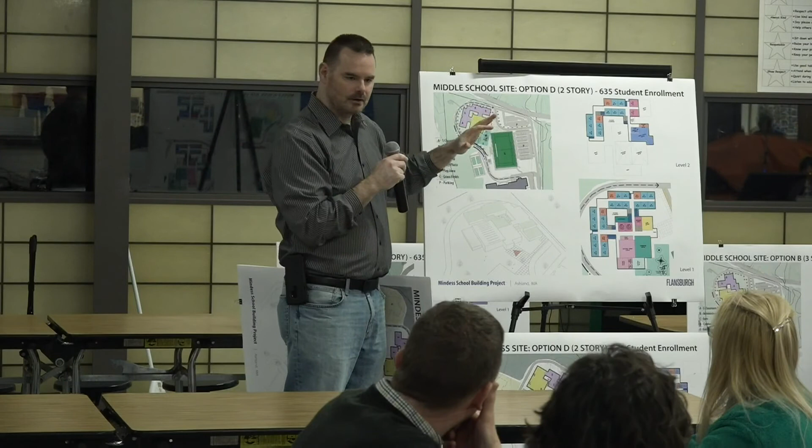So that's essentially the impact, and as I said, there's potentially impact in just easing some of the constraints here and maybe some queuing over there. Those are the considerations, but it is viable as is. It's obviously the ideal to have that access, especially given the lighted intersection that you'd be coming in on.

Has ASHPAC weighed in on the 2 through 5 option versus the 3 through 5 option?

Do you know if... We have certainly reached out to them to have a conversation. Kathy Silva has been part of the conversation the whole time with regard to the 2-5, and I'm sure she's keeping the PAC informed.

Do they have a stance on which? They do not. Not that I know of. They were, right, they were part of it. Yeah, so

The grade configuration is something that has been in the project the whole time, and ASHPAC was involved in the educational visioning process the whole time, so they've been involved. None of this is in any way new to them. They've been involved every step of the way, and they've not expressed one way or the other to any of us. They said, here's a concern, here's a benefit. They were involved in all that educational back and forth, but they have not taken a stance that we know of.

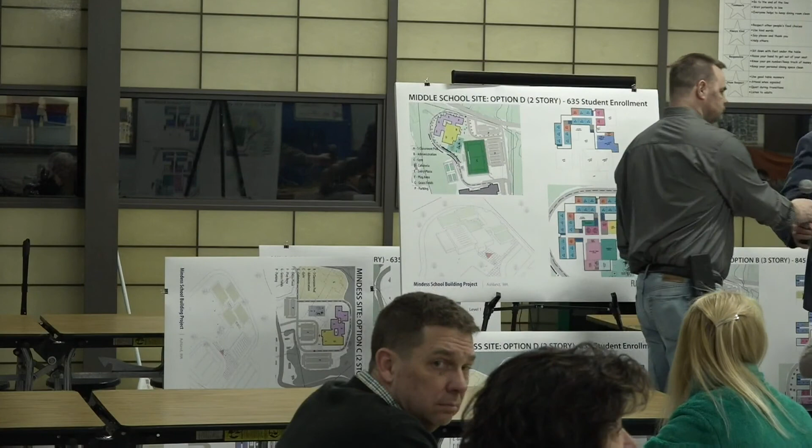Should we go over to sustainability then? Is that the next? Yeah. All right, let me just go back. Working through it.

So in the big picture, with the design options, it's important to know that, as the school building chair stated, when you look at these plans, we're kind of at the 20,000 foot level, but there are patterns you'll see reoccurring, such as the academic pod with community team space, and adjacencies with the cafeteria, stage, and gymnasium. All of this is translated into the educational plan the district is writing, which is one important document the MSBA wants to see successful when they approve the project—that the educational plan is translated into a floor plan. So when you review these plans, keep that vision in mind.

A big part of the project has been sustainability. At our community forum number 2, our sustainability consultant, Green Engineer, and our mechanical electrical engineers, Vanderweil, presented. We also had the sustainability committee at a recent school building committee meeting, which was really informative.

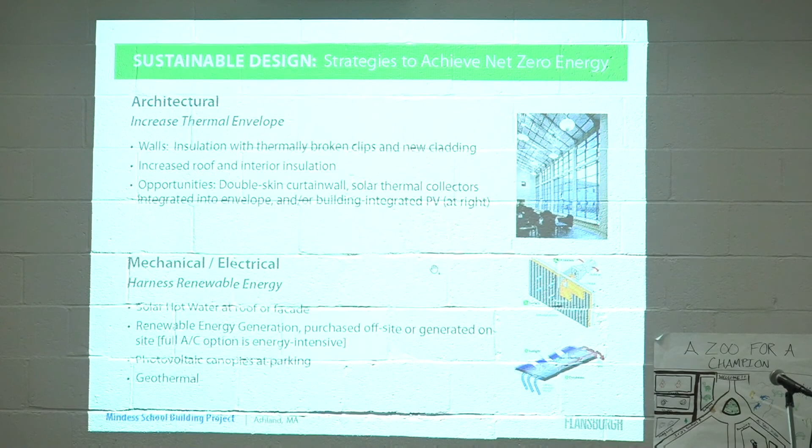So that concludes our presentation, giving you an overview of where the design is. I know it's a lot of information—I don't expect everybody to understand it tonight, but download it, take a look, and at the next community forum or school building committee meetings, you can hear that discussion take place over the next few months.

Okay. Any other questions?